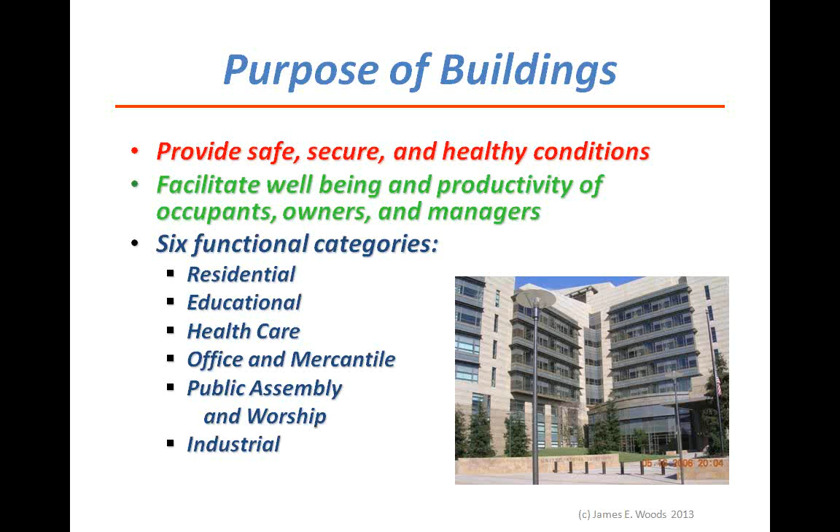Along with the purpose, we need to look at the fundamental objectives of environmental control to achieve that purpose. And I would propose that there are 2. One is to prevent adverse health and safety effects during both normal and extraordinary conditions in and around buildings. And we'll delve into that in just a few minutes. The second is to provide for desired conditions in terms of human response, occupant performance, and productivity.

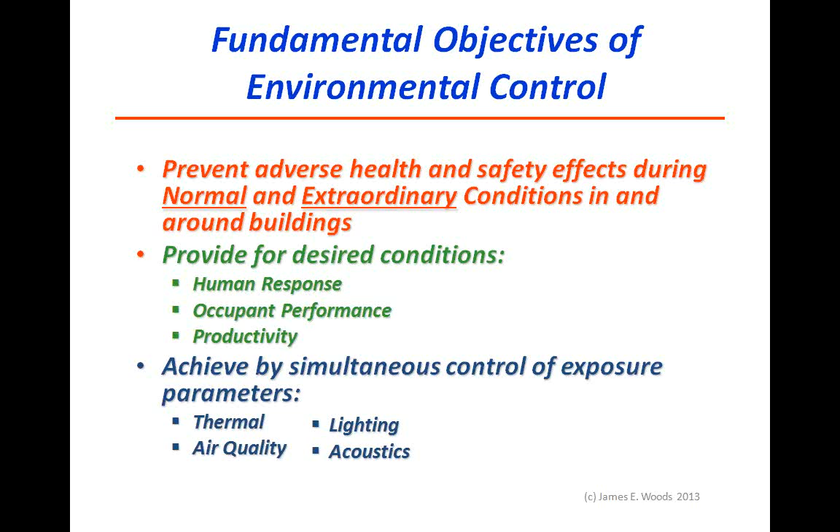To achieve those objectives, we need to consider simultaneous control of 4 exposure parameters: thermal, air quality, lighting, and acoustics. To meet those objectives, let me propose that we base this on two fundamental principles. One is called the Maslow hierarchy of needs. And there's 5 levels of needs, and they're in order.

So the baseline is physiological needs. Once we satisfy that, we look at safety and security. Then we look at the higher order needs of belonging, esteem, and self-actualization. Most of us are used to dealing with the first 2, but not necessarily the last 3. And so we'll be spending some time on that.

The second fundamental principle is an old-timer. It's the definition of health that's in the World Health Organization Constitution, which is a state of complete physical, mental, and social well-being, and not merely the absence of disease or infirmity. The importance here is there's 2 aspects to that.

There's the public health aspect, which is the complete set of physical, mental, and social well-being. The second is the clinical definition, which is the absence of disease or infirmity. So these 2 principles work together quite well. The question I would pose here is, how do performance specifications relate to these 2 principles? And when we get into the discussion section, maybe we can talk about that for a minute.

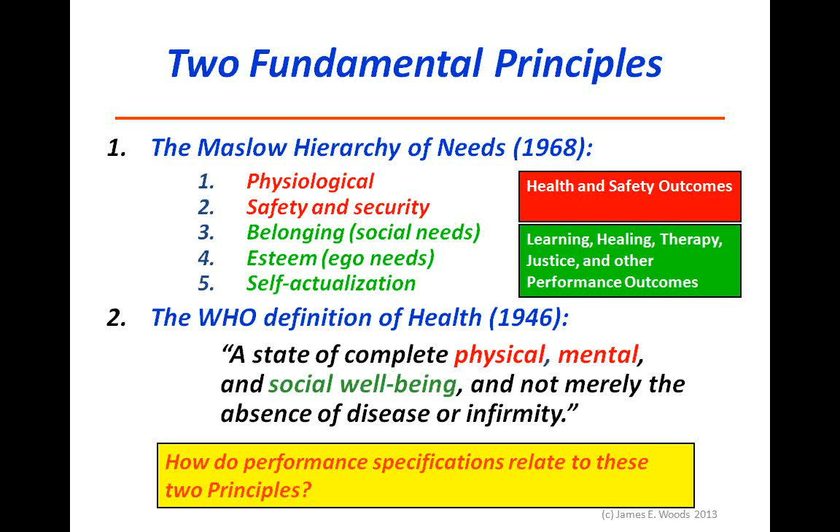Matt, has anybody put in any questions, or should we continue on? I'm certainly in agreement, Jim, with the fundamental principles. It makes sense, but perhaps the issue with LEED and other groups is they don't see safety and security as their territory, the same way someone whose priority is to build tall buildings measures by how tall the building is. Yeah. But I guess if sustainable design when it comes to people can be quantified, then that would be terrific. Well, I hope by the end of the session here we can talk about that and say that really is what sustainability is all about.

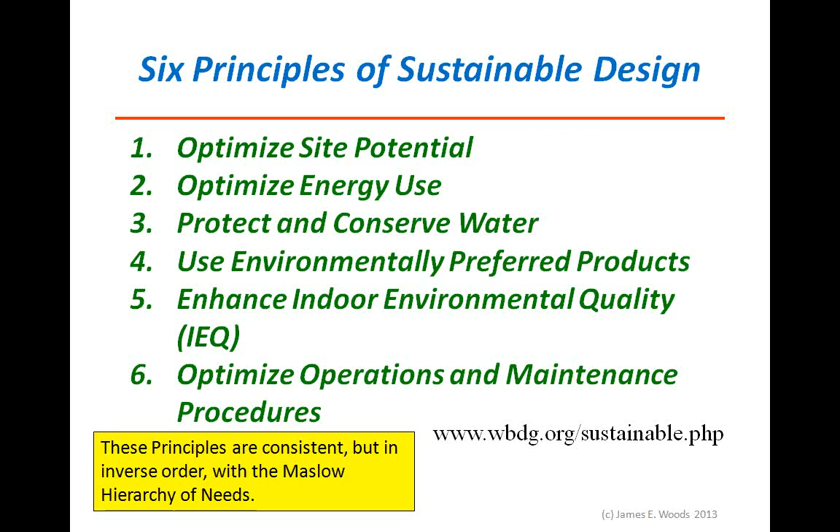Okay, I don't see any questions that have come in, so if we can move on, that would be great. The second question then is, what is building performance? And I'd like to start this discussion with the definition that I was asked to develop a few years ago for the International Society of Indoor Air Quality. It's now been published, but it's based on control theory. In assuming that the building is a total system, we can define building performance then as a set of measured responses of a building as a system to anticipated and actual forcing functions.

And there are two big terms in there. One's measured responses. We need some assurance that the responses are valid and reliable parameters. And you'll see a list there. We'll talk about that a little bit later, but I like an ordered list: the first thing we need to look at is human response. That's caused by exposure. Exposure is caused by system performance, and system performance has an impact in terms of economic performance. So the forcing functions are known physical and social forces that are likely to perturb the building system to which the response functions occur.

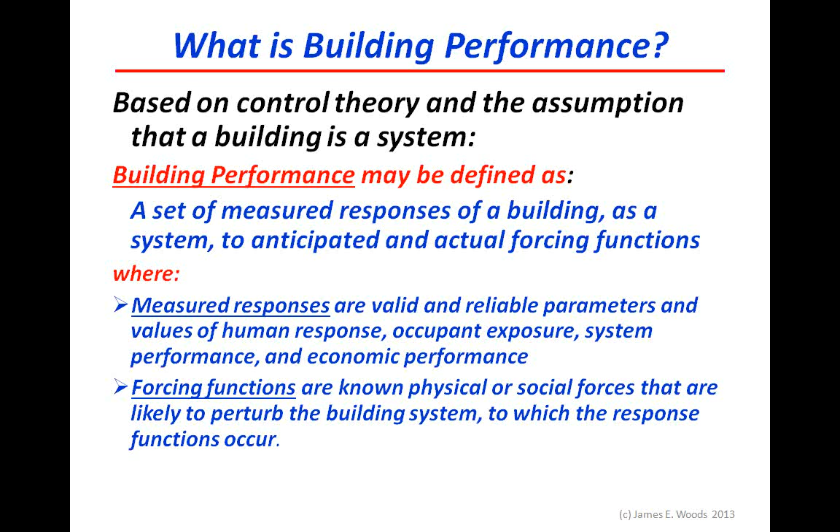Taking that to another step then, there's a definition of high performance building in the EISA 2007. That's the Energy Independence and Security Act of 2007. And in this definition, the term high performance building means one that integrates and optimizes on a life cycle basis all major high performance attributes. And these include 11 different attributes that I'm showing here.

The first two, energy and energy conservation, environment, we do a lot with. Safety, security, durability, and accessibility we do less with. The cost benefit, we tend to do a life cycle cost analysis, but really not cost benefit. We don't seem to spend a lot of time on productivity. We do think about sustainability. Functionality is something that we need to worry about, and operational considerations is something that we hardly deal with at all.

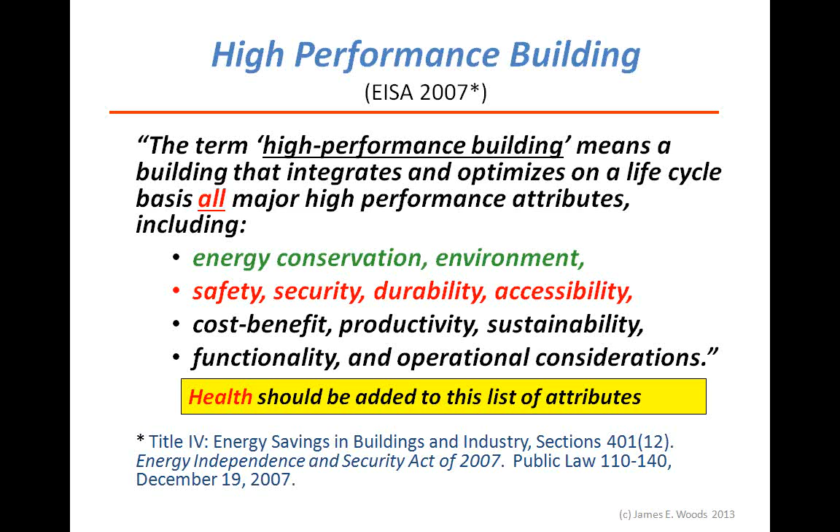One thing I noticed in this definition is the attribute of health is not included, and so I would propose that we really have 12 attributes that we ought to be focusing on. Also in the EISA 2007, there's a term that some of you may have run across, some may not have heard about it yet, called zero net energy. Others call it net zero energy, and either way, I think it's a disaster that it's impossible to meet this thermodynamically. But it's policy, and so we need to deal with it.

The term zero net energy in commercial buildings means a commercial building that's designed, constructed, and operated to meet these four conditions. First is to require a greatly reduced quantity of energy to operate. My first question is, how do you measure greatly? Once you get to the point that you've reduced the energy consumption in the building, and that presumes that safety and occupant exposure is taken care of, but it doesn't necessarily say so.

B says that the balance of the energy, the residual amount of energy that you've got to supply, must come from sources of energy that do not produce greenhouse gases. This is really important because sources such as biofuels don't pertain, because a biofuel is going to be a form of combustion. It's going to produce CO2 and other greenhouse gases, and so it's precluded. So about the only thing we can look at is photovoltaic, solar thermal, wind, items like that. Item C, the product then of using the renewable resources has to result in no net emissions of greenhouse gases.

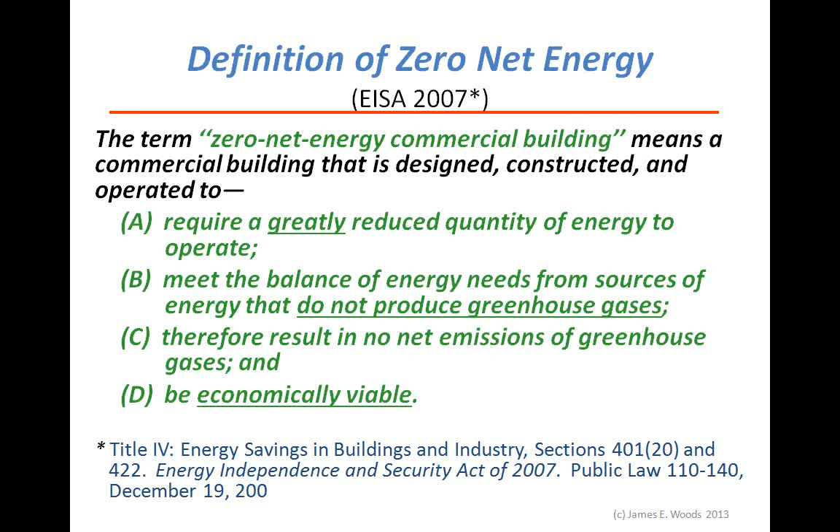And then they go ahead and put huge photovoltaic banks up to be able to deal with a small percentage of the energy used, mostly electrical. And when you look at what's being done from the resource standpoint and then apply item D to that economic viability, it really becomes a problem that we have to deal with. So as we move forward with zero net energy, I think we have to do that with great caution. What I would propose is that we look at building energy efficiency.

That tells us then the type of system and the energy required in order to come into acceptable exposure control. The amount of energy consumed to achieve that energy required then also causes energy waste. So if we look at building energy efficiency as the ratio of the energy required to achieve the exposures divided by the energy consumption, what you see is that the energy consumption is the sum of energy required and energy waste.

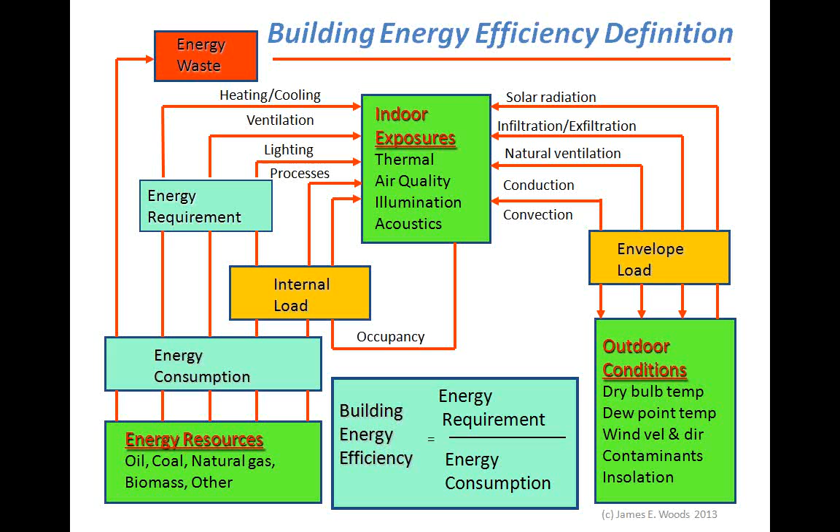I propose to you that we can look at this critical set as an epidemiologic model on top of an economic model. So in series, we've got human response, and then we've got exposure that is the stimulus for the human response. The exposure is controlled by systems. The system responds to sources or loads, and that whole chain rests on a bed of economics.

So we have to look at our systems in terms of first cost, operating costs, energy costs, and productivity or outcome of the whole chain. So what we're trying to do in this case is an optimization model in terms of the performance of that whole system. We want acceptable human responses. To do that, primarily we have to control the exposures, and the exposures are based on our ability to have systems that meet those needs, and then we have to recognize the type of loads and come up with engineering solutions that meet our economics.

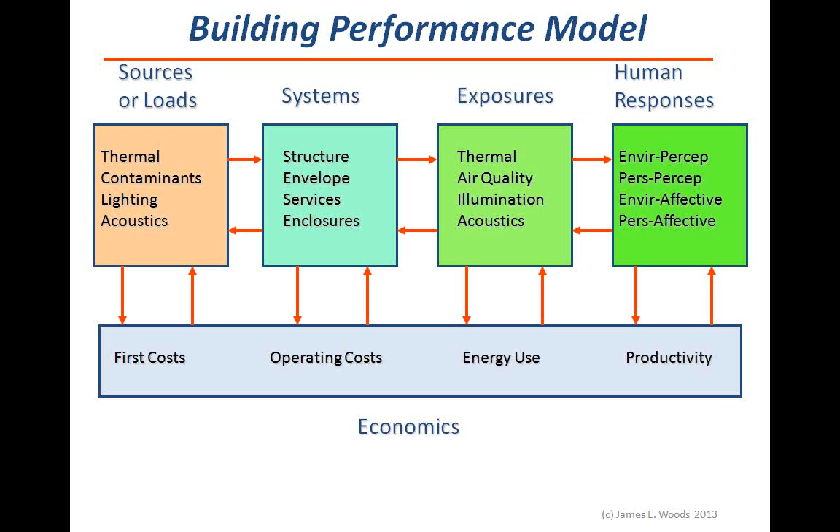In the last few years, there's a new control paradigm we also need to look at, and I want to spend a few minutes talking about it. This is resilience. The first point is to assure energy efficient and cost-effective performance under normal conditions, which with, say, a 100-year life of a building, 90 years of that life are probably going to be under normal conditions. But we may have a few quakes, a few floods, a few extraordinary conditions we've got to deal with in that 100-year period. So we need to think about that in preparedness.

And then the third part is, what do you do with the people during the event? During 9/11, we were getting calls immediately: what do we do in a tall building? Or with the anthrax scare, what do we do if we think there's an anthrax scare in the building? Do we have to shut the whole building down? And if you're in a 60-story building, the last thing you want to do is shut it down. But you do need to know how to respond safely under those extraordinary conditions.

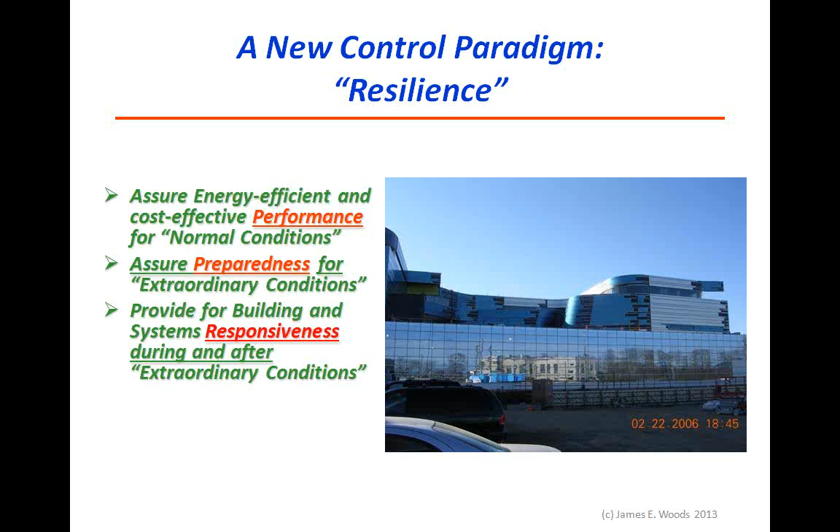So one way to look at that is the concept of residual risk. We've got threat, vulnerability, and the risk of any kind of extraordinary condition. During normal conditions, we're going to be worried about our health, comfort and performance. During extraordinary conditions, if we take the normal conditions and superimpose natural forcing functions such as wind, flood, and quake, you're going to go a long way towards resiliency of the building.

Beyond that, we've got accidental issues—flood, fire, spills, and things that need to be taken care of. Then we get into the intentional threat or vulnerability in terms of criminal conditions, which we have to deal with in terms of arson, sabotage, or vandalism. These all have to be considered from the specification standpoint. And finally, terrorism: blast, CBR, infrastructure, and electronic.

So what I would propose is that we look at the building stepwise, and you take the extraordinary conditions that are most probable in occurrence and deal with that, and then look at what your residual risk after that is. From that, we can come up with a set of criteria that we can work from.

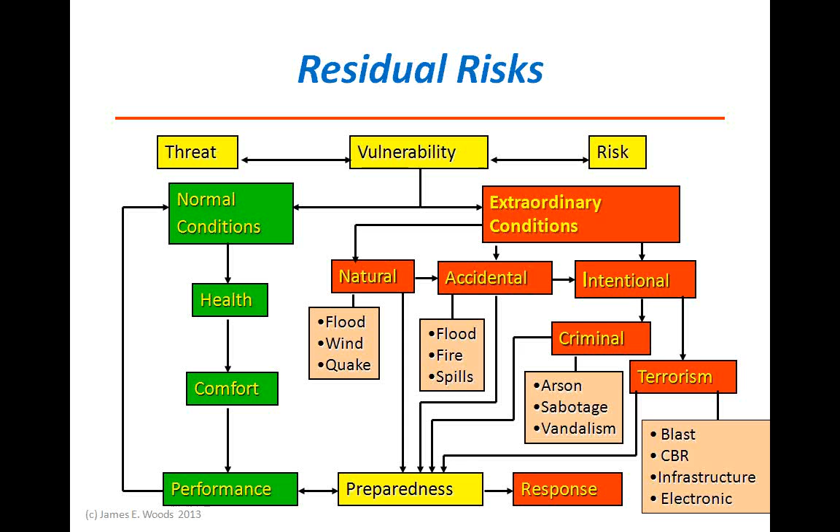I don't see more questions at the moment. Well, let's go on then to the next question, and that's what values of the critical parameters should be specified to assure delivery and operations of high-performance buildings.

The way I'd like to propose this be approached is the first thing you have to do is understand the objectives of why you're setting the criteria. That's going to be a diagnostic effort in terms of either a virtual building or your actual building. Now I'll introduce this contingency matrix in just a minute.

There's two sets of criteria that we need to talk about: one is mandatory and the other is flexible criteria. In the mandatory criteria, we have two terms—one would be human response, the other is exposure. Once you've set your criteria for the mandatory issues, if you're not in compliance with those criteria, you need to change the system to come into compliance. On the other hand, for the flexible criteria, in terms of system performance or economic performance, you have an option: you can either change the system to come into compliance, or you can change the criteria.

So the mandatory is really on the health and safety issues. The flexible criteria would be on the other Maslow issues, and this is where the whole deal of sustainability, energy use, and everything else comes into play. If it were mandatory, we would have to come into compliance with energy consumption, but we don't do that. We have a socially acceptable amount of energy that we use in buildings, and we're making some headway, but basically if you look at the CBECS data, it's been flat for the last 35 years, looking at all of the buildings.

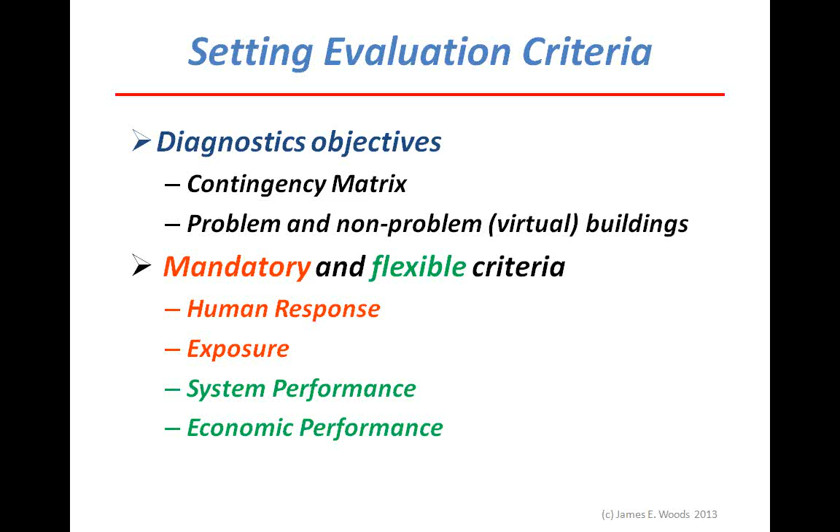To do that, looking at a little flow chart: if we start with the understanding that we're going to deal with a building client, the first question is, why are we dealing with the client? Is this a new building design? Have you been brought in because there are problems in the building, or what?

If it's a problem building, it's pretty straightforward. You set stringent criteria, diagnose the specific areas where the criteria are, and make some recommendations for interventions.

On the other hand, for design, if there's not a problem building, the next question is, do you want to enhance the preparedness of the building? If you don't need to enhance preparedness, you can use more lenient criteria. You're going to diagnose all the areas in the building and see if your design does what you want it to do. If enhanced preparedness is a requirement, you'll have to shift to more stringent criteria and diagnose the vulnerable areas.

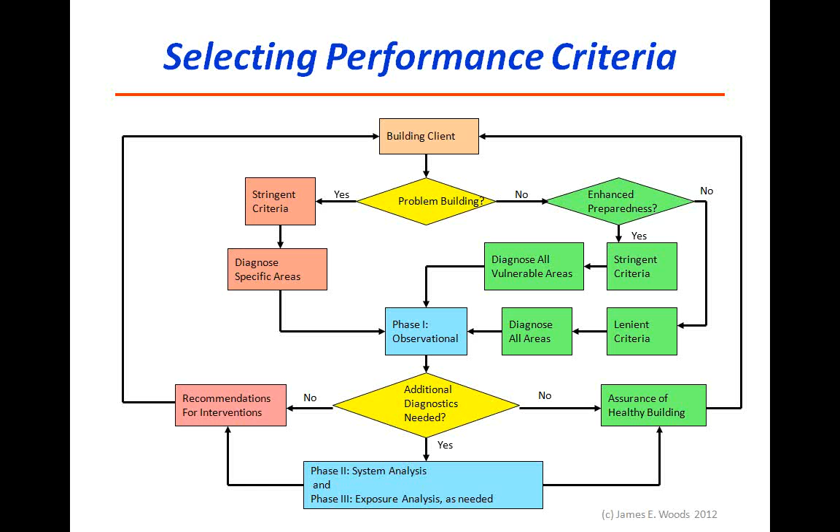So the question here is, in order to set the bounds of the criteria, we need to look at what we call a contingency matrix. In this contingency matrix, in design, what we'd like to have is a healthy building and a high probability of achieving a true negative response.

If we're in a problem building, what we'd like is to get a measurement of a positive occurrence and maximize a true positive event. Now, in doing this, we get two kinds of errors: false positive errors and false negative errors. And we can't minimize both. We can choose to minimize either the false positive or the false negative, and the other is going to float.

So what we have to look at is what's the consequence of the type of error we're going to make. As we become more stringent in our criteria, with less variance that we're willing to accept, the movement is going to be towards minimizing the false negative—not missing an event that occurs, but thinking you've measured something that didn't happen.

So a false fire alarm is a good example of a false positive alarm. As long as there's no harm done, the fire protection people will tell you, well, it wasn't intentional, it was an accident, but you've got your system tuned up.

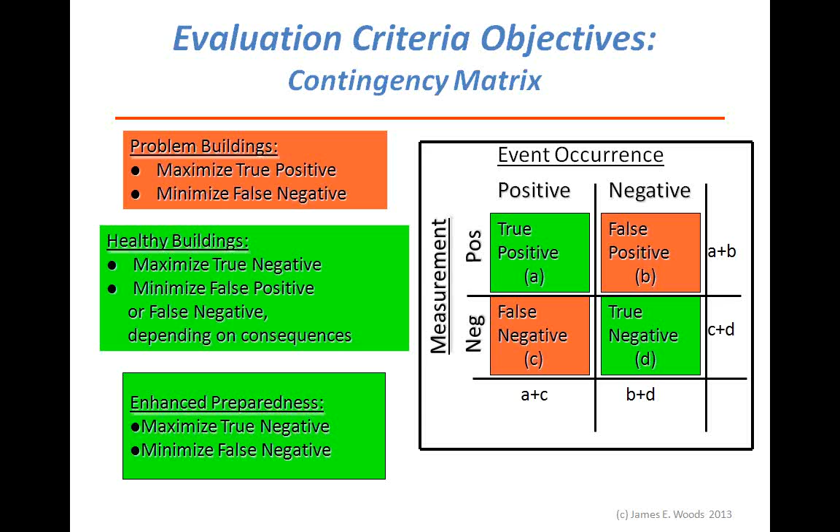We can get into accuracy calculations and everything else, but I think that may be more than we want to talk about today. So what I'd like to do now is go through a sample set of evaluation criteria, to give you a little bit of a flavor for what we're talking about.

In terms of human response, if you look at the evaluation criteria—ASHRAE Standard 55 or 62, or the IES visual comfort probability, or your noise criteria—they're all based on trying to achieve an acceptability response of about 80%.

So if we don't get an 80% response, then we would be in what I classify as a P3. You're not in compliance with the evaluation, with the environmentally effective criteria. It's in the little green box.

Worse than that, if you go down and find that you've got more than 20% of the occupants in the building complaining about two symptoms or more that are alleviated when they leave the building, then you know you've got something associated with the sick building syndrome problem.

And in an even worse condition, if you've got more than one person clinically evaluated as having a problem, that may be a building-related illness issue. So there's a continuity, and in design what we're trying to achieve is that upper level, not getting down into the lower levels. But if the criteria aren't set with enough rigor, the likelihood of degrading into those other categories is pretty high, and that occurs over time.

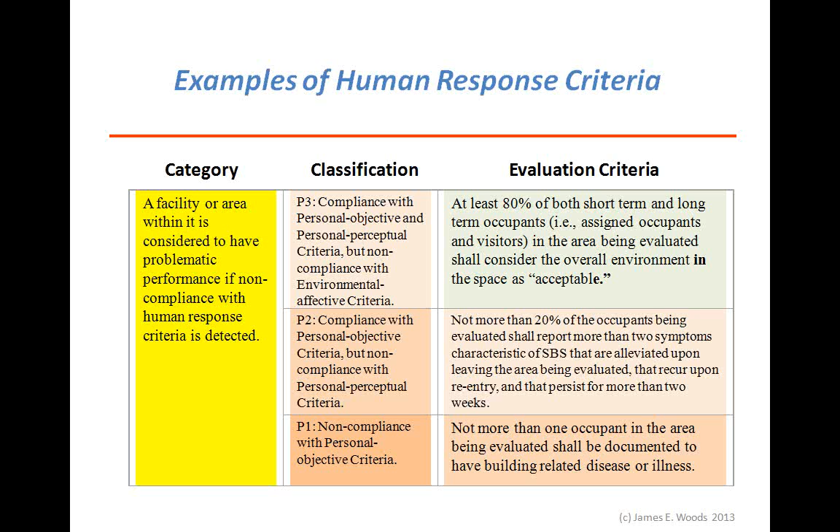In order to achieve the human response criteria, I want to look at a couple of boxes of exposure criteria. This first one is in terms of thermal exposure. We can look at operative temperature, thermal gradient from floor to ceiling, or outdoor exterior position to interior position, or relative humidity in the range of 30 to 60%. Each of those will give us some information to decide whether or not the probability exists that we're going to have acceptable human response.

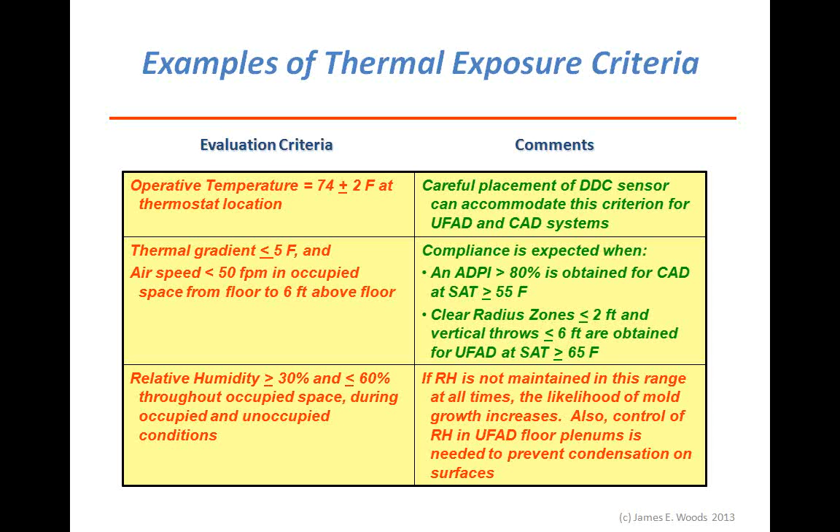Another set is lighting and noise, and I want to take a minute to talk about this. The lighting criteria, I've got an opportunity right now working with the National Institute of Building Sciences on looking at health and safety guidance for the visual environment, with a focus on people that have visual impairments. One of the issues that comes up is the conflict between the energy issues and the lighting issues.

What we're finding is the push on energy right now is to reduce lighting power density, and that's been translated into reducing illuminance values. What we're finding with the low vision population is that we need to more than likely increase the illuminance considerably over what's being proposed in the IES handbook and interpreted by ASHRAE.

So we're looking at moving toward an evaluation criteria in terms of luminance rather than illuminance. And luminance actually gives us a chance to look at contrast ratio and daylight glare index. One of the problems we're finding with the low vision population is almost universally glare is a problem. What we're finding now is daylight is a big push again from new design on envelopes to maximize daylighting. Well, when you maximize daylighting and you don't take care of glare, we've got a problem with the occupants.

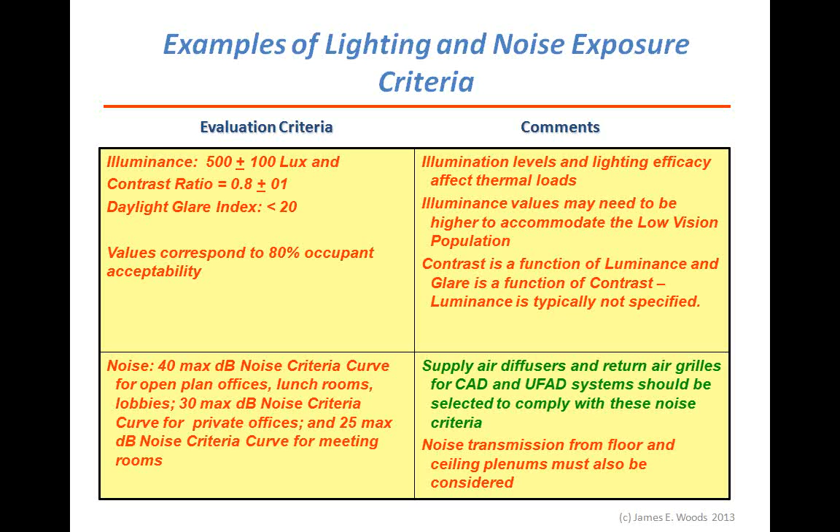The other issue is noise criteria. We also have to meet simultaneously with the thermal and the air quality. We need to meet the noise levels in the spaces.

To do that, we need to look at system performance. There are two criteria I'd like to talk about. One is the capacity load ratio. In deciding how large a system has to be for lighting, air quality, or thermal, we look at the capacity. We look at the design load and make sure we've got sufficient capacity to meet the load at that condition. However, that design condition is likely to only occur maybe 5 to 10% of the year.

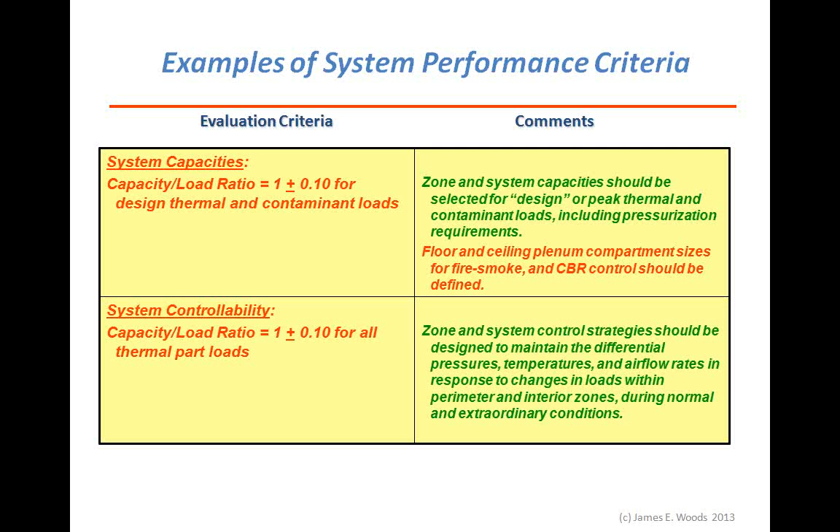So the other 90% of the time we're going to be operating at part load control, and this puts a huge burden on system controllability. So I would propose that we use the same capacity to load ratio, matching the load to the capacity with control under all part load conditions. By doing that, we've got an opportunity to reduce waste tremendously.

The last example I wanted to show is energy and economic criteria. The ASHRAE Standard 90 does not give you an energy utilization intensity or an energy use number. The AIA has given a number since 1974, and it's been constant basically since then at 55,000 BTUs per square foot per year. As an example, if we look at the whole database that's out there and Energy Star and everything else, 55 is a pretty good number.

So 55 plus or minus 10,000 BTUs per square foot per year is an example energy consumption rate. I would propose that on top of that, we put a building energy efficiency term on it of better than 70%, which allows us to focus on reducing our waste by a significant amount.

Now, in economics, I've posted three numbers here: some examples of annual cost of housekeeping, maintenance, and churn services, which should be temporary help when people leave and have to be out of work, out of the employee service line for a while, and extra people have got to be brought in. Interesting here is if you look at the cost of housekeeping plus maintenance plus churn, we're more than double the cost of the annual cost of energy.

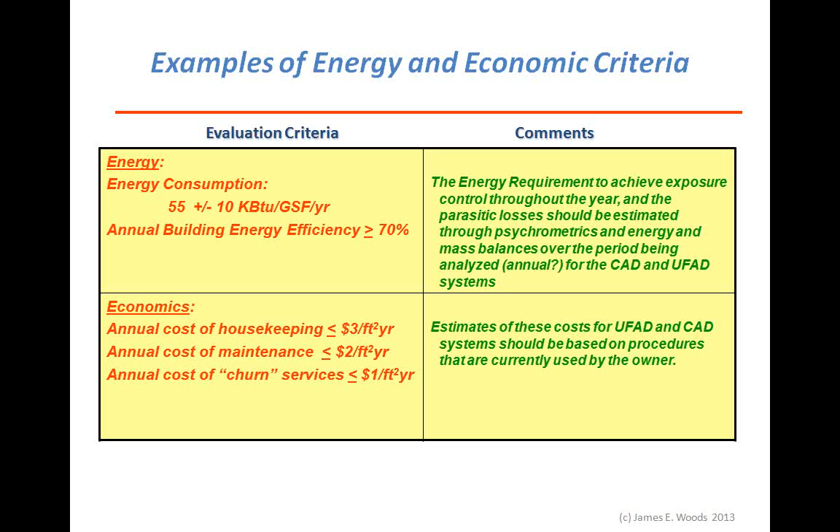Okay, that's a whole bunch of stuff. We'll stop there for just a minute and see if there's any questions.

Jim, there was one question about building information modeling, BIM. I know that Building Smart Alliance and NIBS have big initiatives in this area. Are you seeing where people are using modeling, as Doug asks, are the models sufficiently advanced to model the consequences of risk scenarios so that the specs can include contingencies for these situations? Or how should they be addressed?

Not yet. The BIM models that I'm familiar with basically front-load energy models, so we're using the same energy model we've always used, and we don't get feedback information. What we're seeing in the literature and marketing promotions out there tells us about wonderful energy savings. But when you look at the real meter readings, first of all, you find that probably less than half the buildings being talked about right now have metered consumption. And those that have metered consumption, the difference between what was modeled and what's actually being used may vary by a factor of 2 or 3, where almost invariably the estimated energy consumption is much lower than the actual. So we've got a lot.

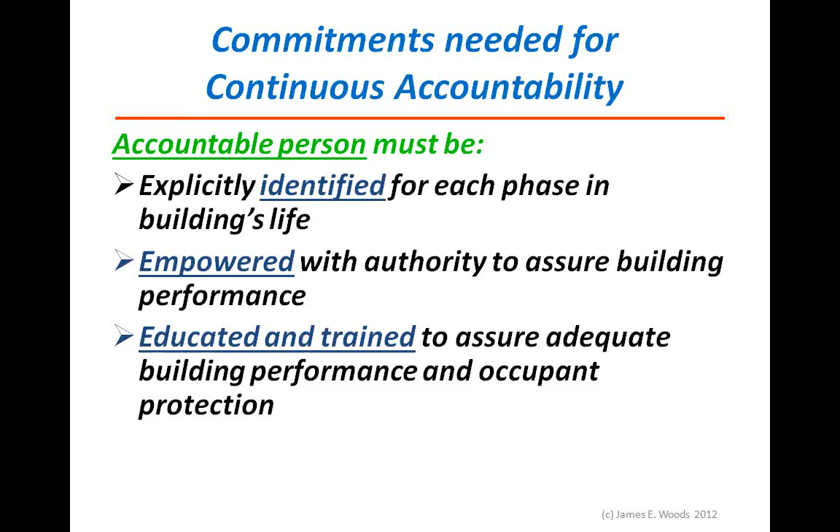What I like to look at is what I call the wheel of accountability in terms of performance criteria. So when we get into the planning stage, this is where we set our criteria. The accountable person in this case would be the owner, who transfers the accountability to the planner. We get into design, and now we begin to translate the performance criteria, and now you've got the designer, the builder, and the owner.

Who are accountable for the translation. Once we get to the construction phase, we get the builder together with the designer, the owner, and the tenant who validates compliance with the performance criteria. And then when we get into operations, we have the owner, the manager, the tenant, and the occupant who assure compliance with the performance criteria. So there's a whole wheel of accountability that we can transfer from one to the other, if we would only do that.

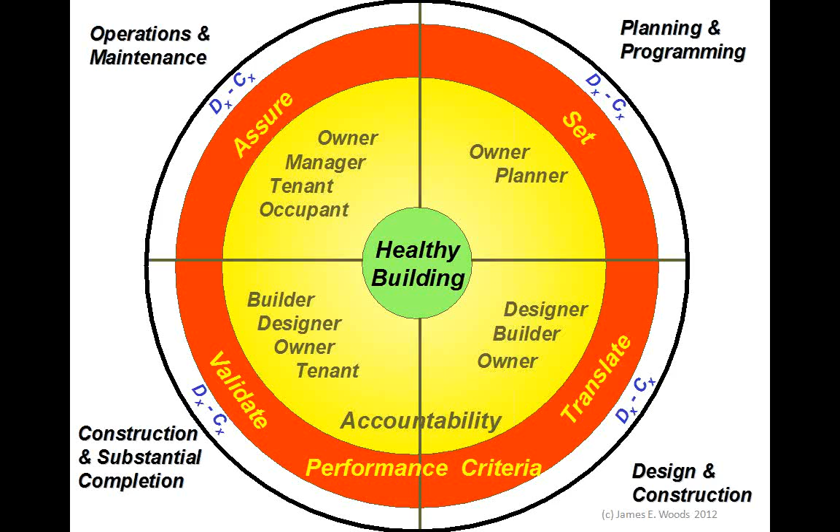And I think with that, maybe we can talk about where to from here.

Thanks, Jim. A question has come in from Doug Langmead that I think relates to how the various costs compare to rental income. There are different values in different parts of the world. So you mentioned cost to a building might be $400 a square foot. But if you've got a building that's all rental and you don't have personnel in it, would the formula change a lot? Oh, great question.

There's a natural tension that exists between the building owner and the lessee, the person that is leasing space in that building. The lessee tends to want to maximize the occupancy density of the space. The building owner wants to optimize the occupancy density, wants to fill the whole building. But the tenant is only interested in one little part.

So basically what happens from a tenant standpoint, the cost of salaries is going to be considerably higher than the cost of energy. It'll probably go up more than the number I just quoted.